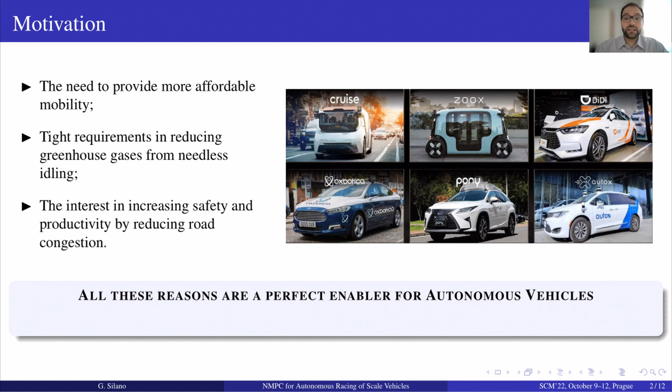Over the last years, the need to provide more affordable mobility and to reduce greenhouse gases from needless idling, the interest in increasing safety and productivity by reducing road congestion is creating a highly connected infrastructure that is a perfect enabler for autonomous vehicles. What is making all of this possible is a set of instrumental technologies that are just now reaching maturity. On top of that, autonomous driving is gaining momentum as evidenced by the numerous applications in commercial vehicles where these automatisms have proved effective.

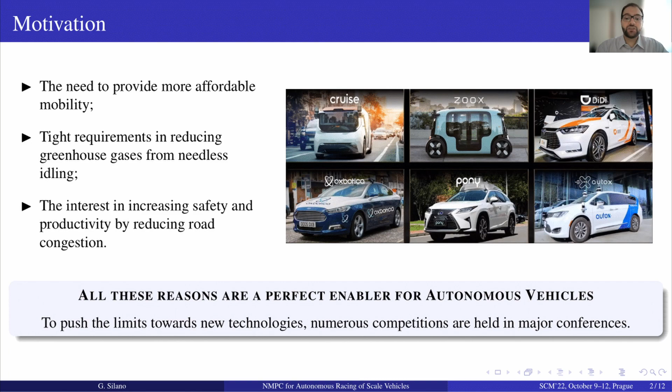On the right side of this slide, we can see some of the autonomous vehicles that are now driving our roads in our cities. The aim is to push the limits towards the development of new technology, and one way to do that is represented by the numerous international competitions on autonomous racing cars organized and held in major international conferences. Above all the competitions, the F1/10 autonomous racing competition is one of the most popular, whose name derives from the use of 1 to 10 scaled-down car models.

Depending on the task objective, the problem is faced with different levels of detail and approximation. In any case, each time the goal remains almost the same: do not crash, minimize lap time, and overtake all opponents. Several approaches have been proposed in the various editions of the competition. However, when vehicle nonlinearities are excited, the control task is more demanding, and this opens new challenges to be solved.

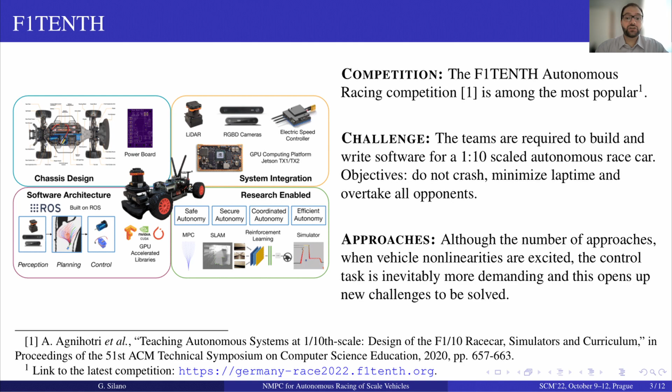The model predictive control approach has proven to be a promising solution to control the car motion. Specifically, nonlinear model predictive control has resulted particularly suitable to control autonomous racing cars when their agility is essential for the particular application and must be exploited at the best. The problem requires the car to race along the track, minimizing lap time, remaining within track boundaries, and safely compete, avoiding static obstacles populating the track.

A nonlinear model predictive control architecture for center line tracking for autonomous racing competitions is proposed in this paper, considering the case of 1 to 10 scale racing cars. The optimization problem, as I said, considers both the vehicle dynamics constraints and the physical actuation limits. Also, the car dynamics is described by a bicycle model, and longitudinal and lateral forces acting on the vehicle are modeled by a drivetrain model and the Pacejka magic formula.

The identification process is set up to obtain the model parameters using the experimental data collected in the F1/10 simulator. The nonlinear model predictive control approach is embedded in ROS and coded using the OpEn framework and PANOC as solver. Both the optimal racing trajectory and the tracking lane problems are solved within the same optimization framework.

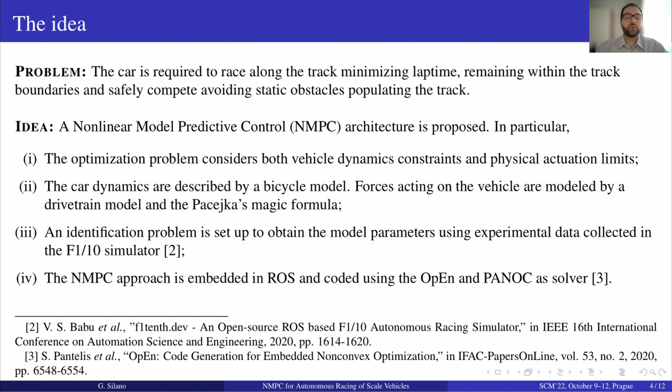The prediction model is a key part in NMPC laws. One of the most common approaches in vehicle dynamics applications is to simplify the vehicle's model to that of a two-wheeled bicycle model. This approximation is sufficient to provide the necessary inputs to the actuators due to the small size of the vehicle. Using Newton's second law and analyzing the forces and the moments acting on the vehicle, we can derive the set of equations that describe the system dynamics.

For the sake of brevity of this presentation, I couldn't include all the steps and derivations. Further details are available in the paper. However, we can take a look at the equations that are reported on the right side of the slides. And this set of equations requires a few comments.

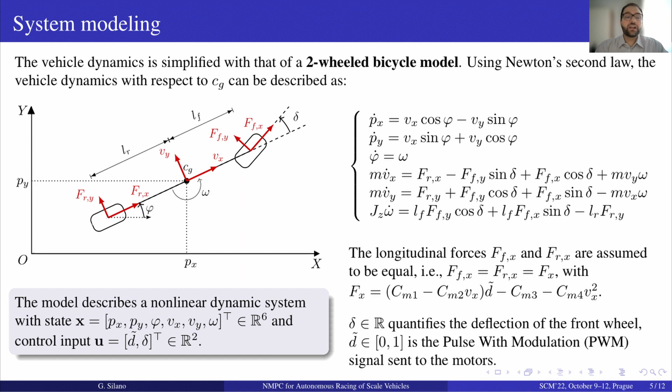First, for ease of modeling, the longitudinal forces are described by Fx. Second, control inputs are delta, that is the deflection of the front wheel, and D, that is the pulse width modulation signal that is sent to the motor. The end result is a nonlinear dynamic system whose state is x in R6 and the control inputs u in R2.

In order to exploit the prediction model, it is pivotal to identify the model's parameters, in other words, those describing the lateral and longitudinal forces modeled by the simplified Pacejka magic formula, and the drivetrain model. Acceleration and deceleration experiments in the F1/10 simulator can be used for the identification process based on a least squares minimization approach. Here we can see the minimization problem, where v_x hat, v_y hat and omega hat represent the one-step prediction linear and angular velocity based on the discretized vehicle model, while bar zeta and underline zeta denote the range of maximum and minimum admissible values, respectively, for the parameter zeta.

In the figures reported at the bottom of this slide, we can see a comparison between the identified values, so the hat symbols, and the collected linear and angular velocity values. The optimization problem was coded using MATLAB, and in particular fmincon of the MathWorks Optimization Toolbox.

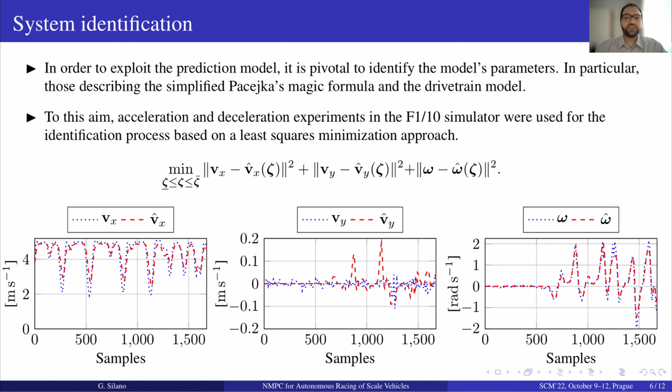Now, let's focus on the control architecture. A two-layer control architecture has been proposed to cope with the racing problem. A reference generator algorithm provides the reference point coordinates to an NMPC tracking controller, which computes the control signal to reach the point while satisfying all constraints.

The reference generator supplies the reference point at each instance of the optimal problem. The planner leverages the capability of computing the projection of the car position along the lane center line, and this is in line with the competition rules, and for ease of experimentation, the proposed solution assumes to know the shape of the track and therefore the lane center line.

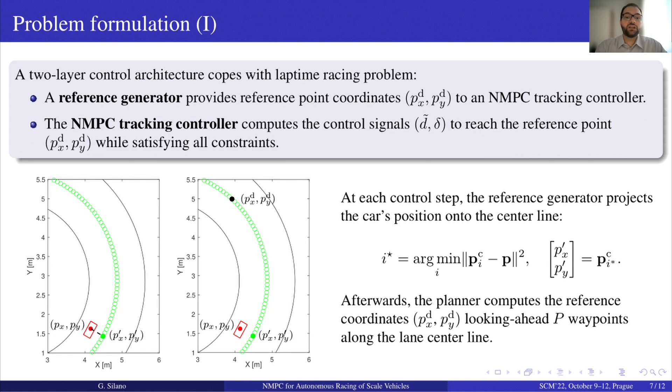At each control step, the reference generator projects the car position onto the center line. Afterwards, the planner computes the reference point coordinates, looking ahead P waypoints along the lane center line. These figures reported in the left corner of this slide represent the two steps of the reference generator. In the first, we can see the projection of the car position on the center line. Instead, in the second, we can see the P waypoints look-ahead to obtain the reference point for the tracking controller.

Track boundaries constraints are also embedded into the problem formulation to maintain the vehicle within the limited width track. The constraint is formulated considering the Euclidean distance between the vehicle's position and its projection on the boundaries. Two variables are considered in this case, RG and RC, in order to impose the constraint. The first models the track, the second the car dimension. In both constraints, the square terms ensure differentiability everywhere, while guaranteeing the same constraint characteristics.

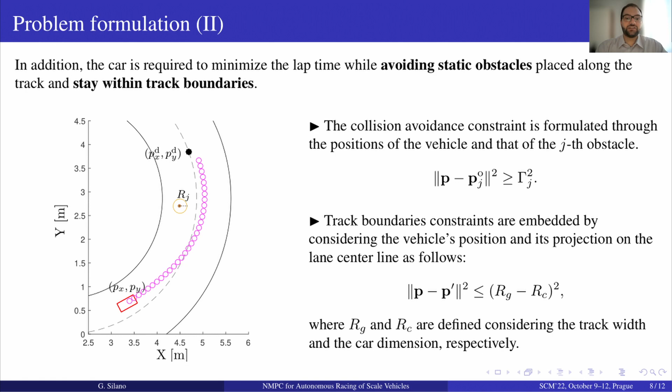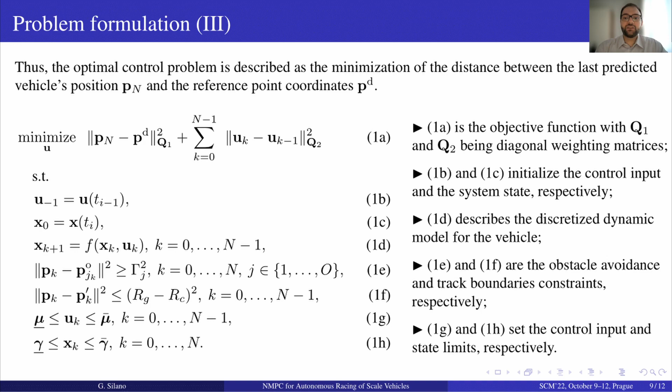1b and 1c initialize the control input and the system state respectively. 1d describes the discretized dynamic model for the vehicle. 1e and 1f are the obstacle avoidance and track boundaries constraints respectively, and finally 1g and 1h set the control inputs and state limits respectively. Now, the control problem was coded using a single shooting implementation with track boundaries and obstacle avoidance constraints treated using the augmented Lagrangian and the penalty method approaches respectively.

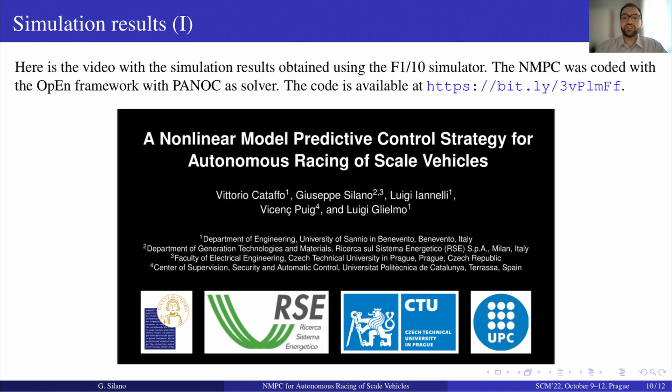Now, the problem has been set up and we can analyze the numerical results. To demonstrate the validity of the proposed control strategy, numerical simulations in the F1TENTH simulator were performed. The nonlinear model predictive control strategy was coded using the OpEn framework and PANOC solver. Let me play the video, in the meantime describing a bit how the numerical results have been obtained and how the scenarios were chosen. Let me also say that the code has been released as open source and is available on GitHub.

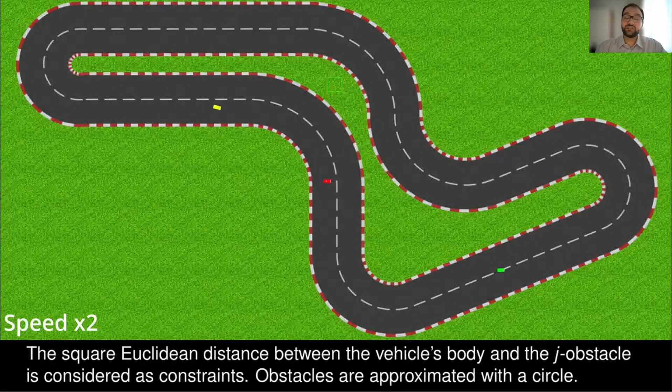So, while the simulations are running, 3 different tracks in which the vehicle runs in counterclockwise direction were considered. In all simulated scenarios, the car's velocity touches the actuation limits for most of the track. Minimum velocity values can be seen in the most demanding stretches, where the minimum value is just under 3 meters per second. It can be seen how the car slows down in the sharper turns and accelerates at the exit of the turns. The same simulations were performed considering static obstacles along the track. As you can see from the video, in both cases, the algorithm was able to control the car, staying within the boundary and avoiding collision.

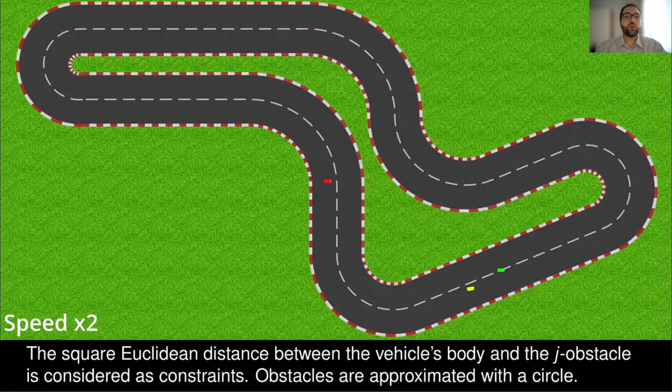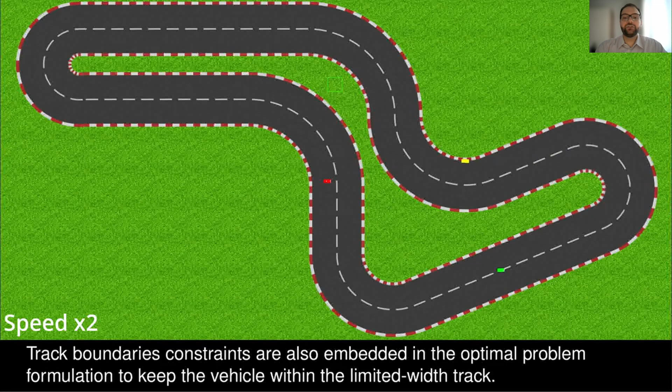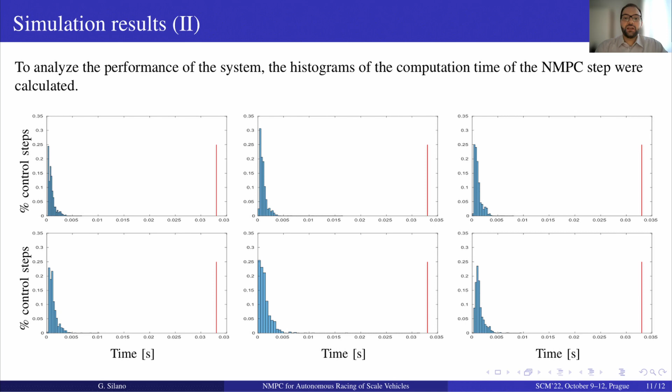What does this mean? This means that the control problem is able to find a solution and provide the next control input U before the sampling time, that in this case is represented with the red bar, and this is fixed to 33 milliseconds.

Now, to conclude, this paper has presented a nonlinear model predictive control strategy for autonomous racing of scale vehicles. Simulations performed in the F1TENTH simulator demonstrated the validity of the control strategy in a scenario as faithful as possible to real-world conditions. Future works are in the direction of including advanced planning solutions to deal with uncertainties on the lane center line. Also, we plan to investigate more challenging scenarios, such as the combination of static and dynamic obstacles, in the direction of field experiments.